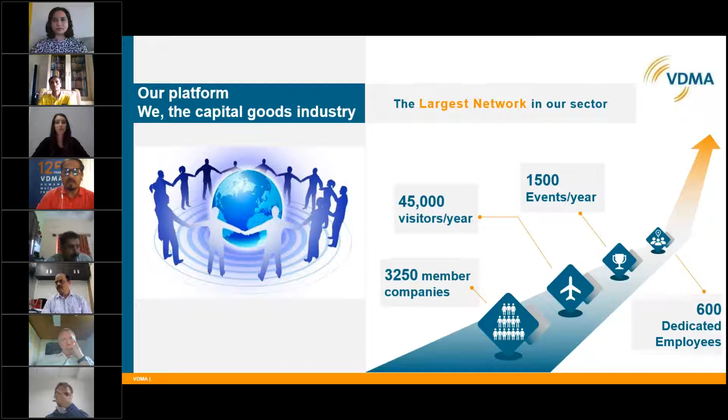Over the years, we have built a member base of 3,250 companies. We have been receiving visitors of 45,000 visitors across the year, every year. We are organizing 1,500 events every year, and we have 600 dedicated employees.

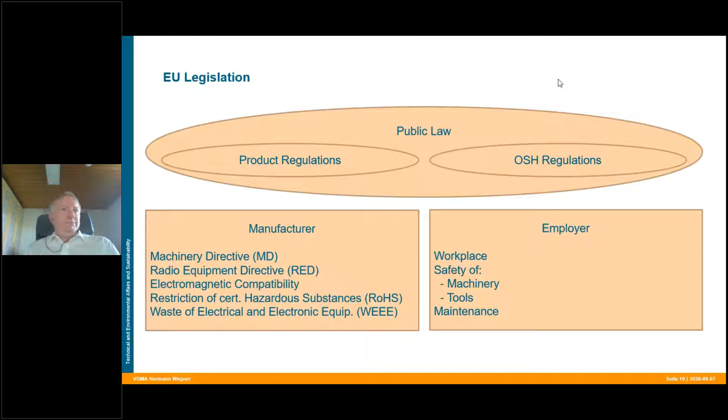For product safety, especially in Europe, you have several documents. The first of them is the Machinery Directive. It's in Annex 1. It describes a lot of mechanical risks, electrical risks, electromagnetic compatibility, and so on.

All these risks described in this Annex 1 have to be mentioned for the machine, and have to be processed in a risk analysis where the manufacturer has to look at the machine itself, at the risks that may be combined with the machine, and to decide if these risks are acceptable or not acceptable.

These risks in this Annex 1 are very common. They are not so specified, and it's not so clear what risk is acceptable and what is not. But to decide this, there exist some technical norms and technical standards like ISO 12100, safety of machinery, general principles for design, risk assessment, and risk reduction.

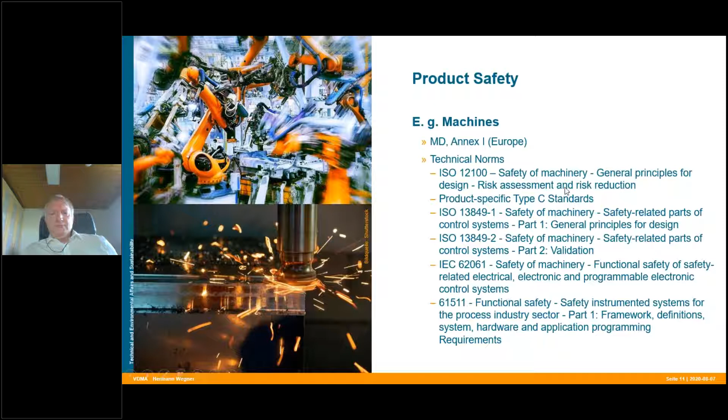For durable, safe machinery, it's not only useful to have a safe product on the market, but you have to maintain it. This is the third point: continuous maintenance for risk reduction is also necessary, because the safety of machinery will decrease over its lifetime.

There are two factors. One is the information of these technical standards. When the machine is produced, they are state of the art, and the application of these standards is state of the art. But as time goes by, there is new information, new knowledge, and when you take this into regard, the inherent product safety is slightly decreasing.

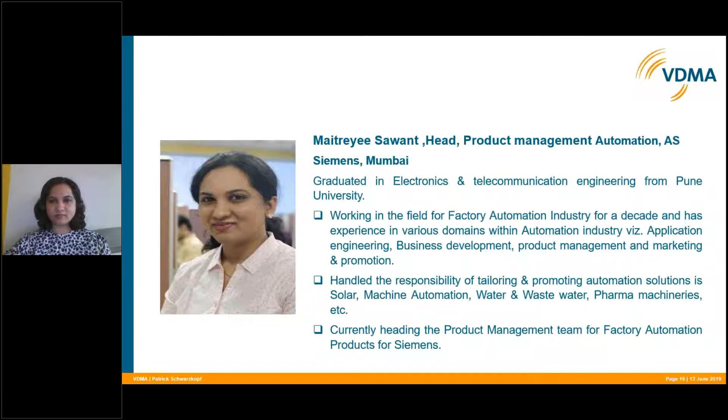Safety of the machine, or of the human working around the machine, and also of the environment in which the machine is working, has become an utmost priority for any manufacturer. So why is it so important, and how can we make our machines safe? We will see it in today's session.

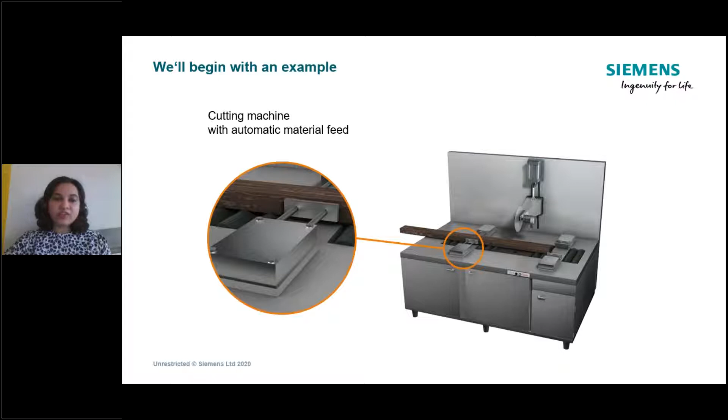Let us understand this with the help of an example: a metal cutting machine. There's a clamp to hold the metal and a rotating cutting disc to cut it. Since this is an open cutting machine, it is evident that it is a very unsafe operation. To avoid any unfortunate incident and the relevant human, reputational, or monetary losses, implementation of safety becomes utmost important. Now, how do we make this machine a safe machine?

There are 3 phases for making a machine safe. First, assess the risk of the machine: understand its operation. All types of operation should be taken into consideration, whether manual or automatic. Risks should be identified, and then there's a stage where you identify the methods by which you are going to reduce these risks. Ultimately, whether the methods implemented are really capable of reducing the risk to an acceptable limit has to be certified and validated. So these are the 3 steps.

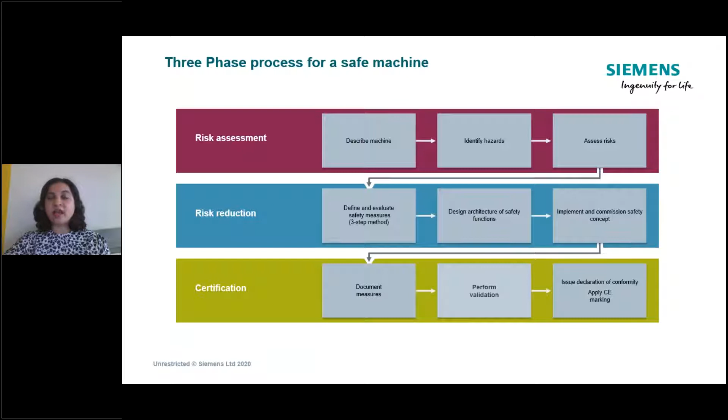Going back to the example, let us see the risks in this machine. This is a very open machine, and the cutting blade captures our eyes - this is something very dangerous. The metal piece is also going through clamps, so there's a possibility that the hands of the operator can get crushed. The operator can also lose his arm because of this open cutting disc. Such cutting machines also emit a lot of dust on account of cutting, which might affect the environment and the people working in it.

These risks are usually categorized into certain levels of risk so that necessary actions can be taken to reduce them. These levels are categorized based on ISO and IEC standards - we have SIL 1 up to SIL 3 level, and PLA up to PLE level. Considering this example, I can see we have a very severe risk, so let us categorize it.

Here we see that if the cutting disc injures the operator, he has chances of losing his arm. This is an irreversible injury, and it's a very high risk. As for how frequently it is expected to happen - since it is an open machine and the operator is working on it in shifts, maybe 8 hours, it is very likely that he might get injured. So this risk is categorized at a very high level.

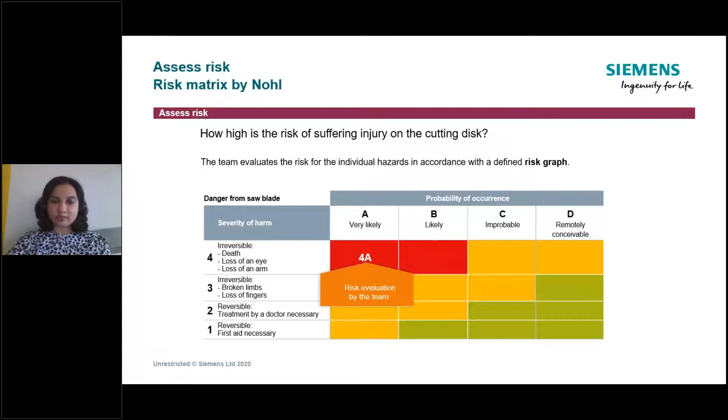Now let us see what steps we can take to reduce this. As Mr. Wegner has also explained in his slide, there are steps we have to take to reduce risk. First, you try whether a change in design would help. If the risk is still not mitigated enough, you look into the technical measures implemented into the machine, changing or adding safety to them. Usually the risk is reduced to a good level here, but if there is still any residual risk, you can use information or notices to the users on what instructions to follow while operating the machine.

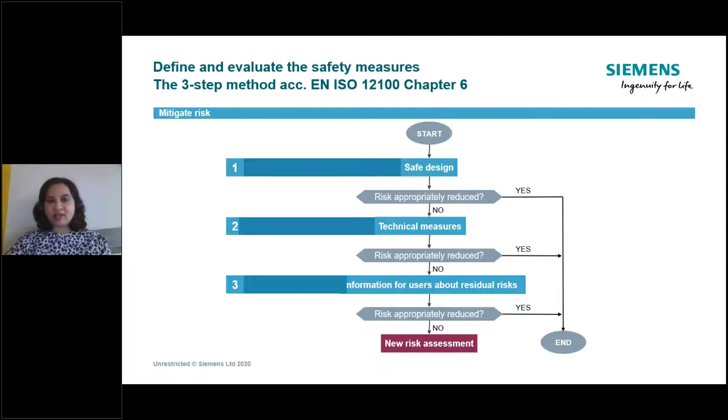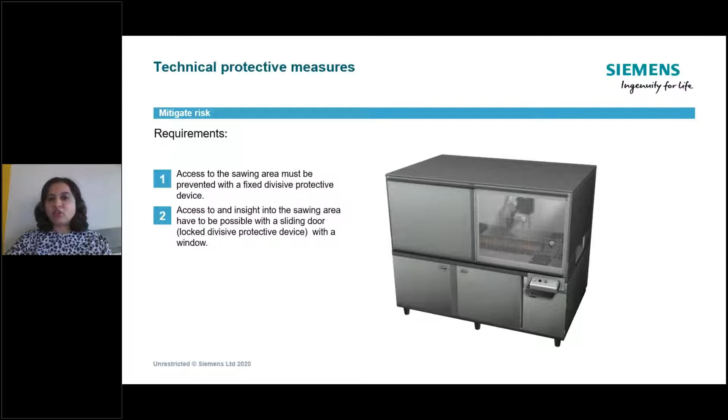Let's implement this on our example. Since it was a very open machine, we have given it an enclosure, and this enclosure will avoid direct exposure of the operator to the arm that was cutting the metal. This will reduce the risk to a good extent - this is what I feel, but let us analyze it. We cannot completely close the machine because there has to be some access given to the operator when required, so there's a sliding door here.

Now let us see the risk chart again. As the risk chart shows, though we have given an enclosure, the risk is reduced, but only the probability is reduced, because the frequency of the operator getting exposed to the harmful components of the machine is getting reduced. But the severity still exists, because if he uses the sliding door and accesses the machine, there are chances he still can lose his arm. So the severity is not yet mitigated - that's why we have to go to the next stage, which is technical assessment.

So here, let us go to the technical assessment on the same machine and see how we can handle it. Next slide.

Talking on the technical part now, what we are trying to do is we are going to detect the position of the protective door. Understanding the position of the door, if we get a feedback that the door is open, immediately a command has to be passed on to the motor to stop. So the machine should stop. This would avoid any harm caused to the operator while he's working on the machine. Additionally, we also give an emergency stop to the operator so that if he feels it is an unsafe situation, he can himself stop the machine.

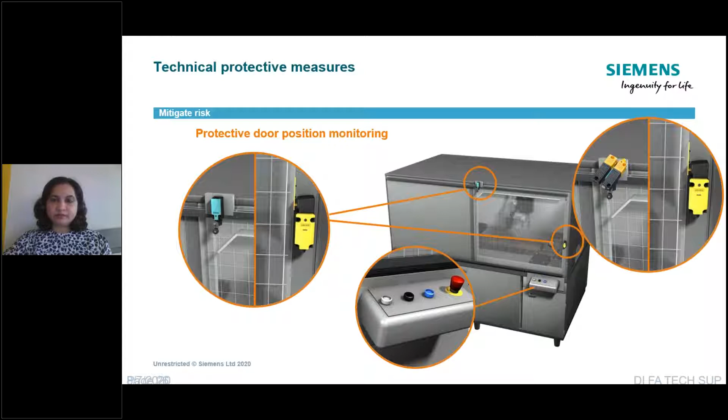So here we saw that since the chances of the operator getting injured because of the disk is reduced to a good extent, and since he's going to open the door and the machine is going to stop, at the most he will have a cut or something like that. So this is okay, we are in the green zone now, good to go. This is how we mitigate the risk of an unsafe machine.

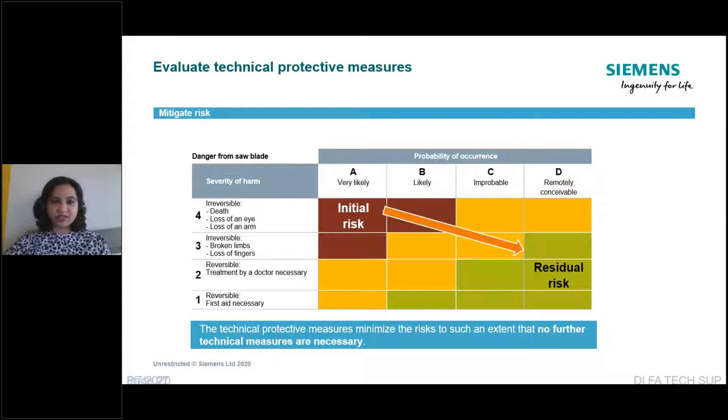So what we did here to mitigate the risk was that we detected the position of the safety door. We evaluated whether this is an unsafe condition and what has to be done, and the necessary action was taken by giving a command to the motor to stop. So the cutting disc was also stopped immediately. This is where the safety system fits in, and the safety system works in 3 levels: detect, evaluate, and react.

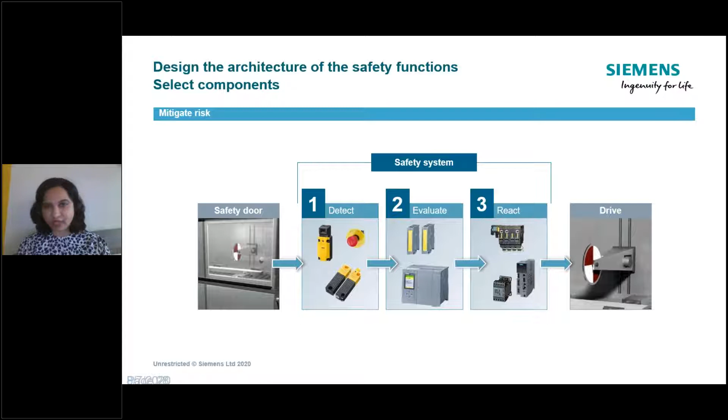Evaluation is the stage in the safety solution where automation plays a big role. So in evaluation, the PLC as well as the IOs play a major role there. Now this PLC and IOs I am talking about are a safety PLC and safety IOs. The safety CPU and safety IOs are designed with an inbuilt testing circuitry. It comprises dual channel processors in order to confirm the signals received, and it follows a coded processing technique which creates a diverse logic. This logic is created on the received signals, which ensures that the detection of fault is surely confirmed. Any discrepancy, if detected, the signals are sent on priority to bring the machine to a safe shutdown.

Additionally, the IO modules used are also designed to continuously monitor for errors like short circuit or wire break, etc. This continuous monitoring can help early detection of problems and bring the machine to a safe shutdown at the right time.

Next slide, please. Thank you. So these modules as well as the safety PLC are continuously evaluating, and there is something called passivation and depassivation which it follows.

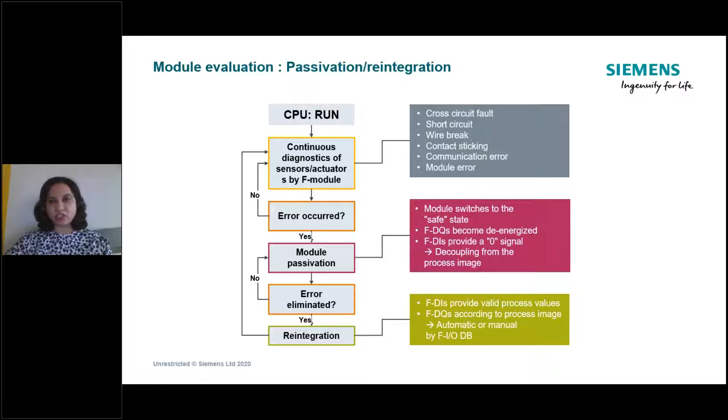In a continuous diagnostics of the sensors and actuators by the fail-safe module, it detects whether some error has occurred, and if an error occurs, the module goes into a passivation state, so it is de-energized, the DOs become de-energized. There are possibilities of module passivation as well as channel passivation. In case the error is eliminated, a normal PLC would just start when the error is eliminated, but for a fail-safe condition, though the error is eliminated, the depassivation is still not done. In this case, an acknowledgement is expected, and on the acknowledgement only the depassivation is done and the DOs are re-energized.

So what are the possible varieties of safety IOs and safety controllers available in the market today? It is not that for fail-safe application you have to go for a very high level controller. There are fail-safe controllers available right from basic automation level up to advanced controllers. There are also fail-safe controllers available in distributed architecture. In case you want to install a soft controller or soft PLC on your PC, that is also possible with soft controllers available in fail-safe variant. And in case you want to implement a high-level language program along with a PLC language program on the same platform, that is done by an open controller, which is also available in fail-safe versions. Now, these we talked about are all mounted in IP20 type of installation, but there are controllers supporting fail-safe operation in IP65 and 67 type of installation as well.

Moving on to the variety of IOs that you can choose from. There are centralized IOs, the standard IOs and the fail-safe IOs can be mounted together on a single controller.

Then there are distributed IOs for a decentralized architecture, and fail-safe distributed IOs as well. In case you want to mount the IOs directly on the machine, that is possible. We have fail-safe IOs supporting IP65 and IP67 installation, mounted on the machine and supporting all the vibrations necessary for that.

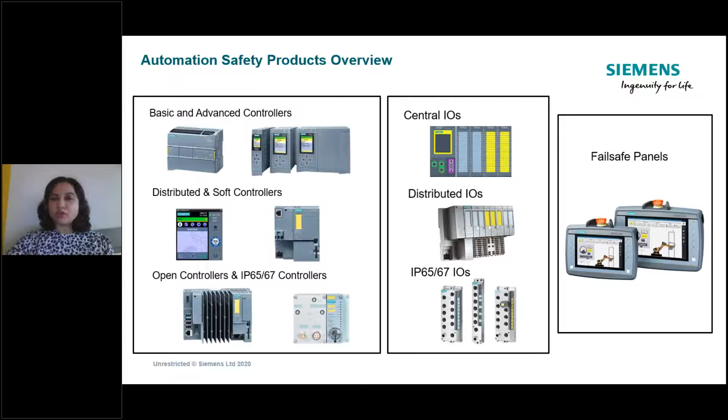It is created for timely transfer of safe data. These frames include an integrity check, so integrity data check, that is the CRC data. It also includes timing information - time monitoring is done continuously, and that information is embedded here. It also has accurate identification of senders and receivers embedded. So this means that ProfiSafe ensures right data at right time and at right place.

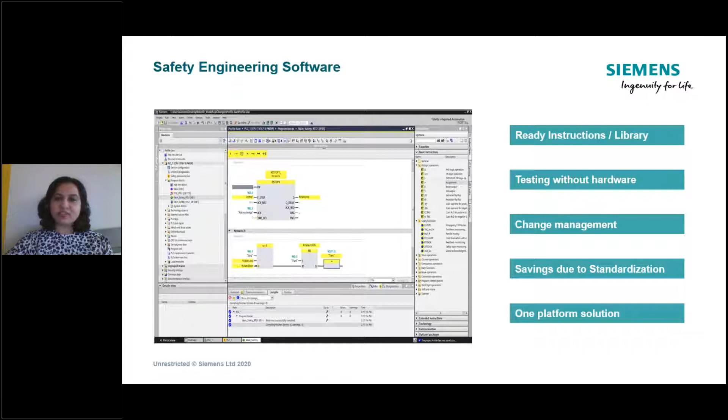What happens here is, okay, this is good, but this is very traditional now. And what happens here is there's a lot of wiring, a lot of engineering effort, and so many interlocks, so to manage it becomes a little critical. So there is also a new trend which has evolved and which we as Siemens are continuously promoting, and that is integrated safety. So we see it on the next slide.

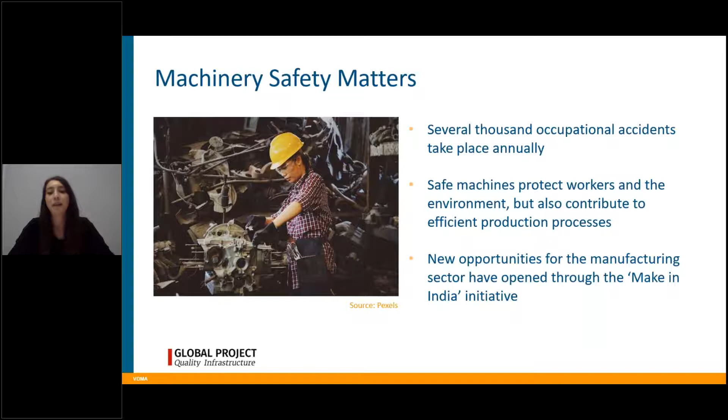And of course, machinery safety is also an important topic because of new opportunities that have opened up in the manufacturing sector, for example, through the Make in India initiative.

The Indo-German Working Group on Quality Infrastructure provides a forum for both countries to discuss the significance of machinery safety and also to understand each other's approaches to machinery safety. It was established in 2013 by the Indian Ministry of Consumer Affairs, Food and Public Distribution and the German Federal Ministry for Economic Affairs and Energy. The working group brings together representatives from ministries and government institutions, standards and accreditation bodies, industry associations and companies, as well as technical and scientific institutions, and provides a forum for political and technical dialogue between all of these key stakeholders.

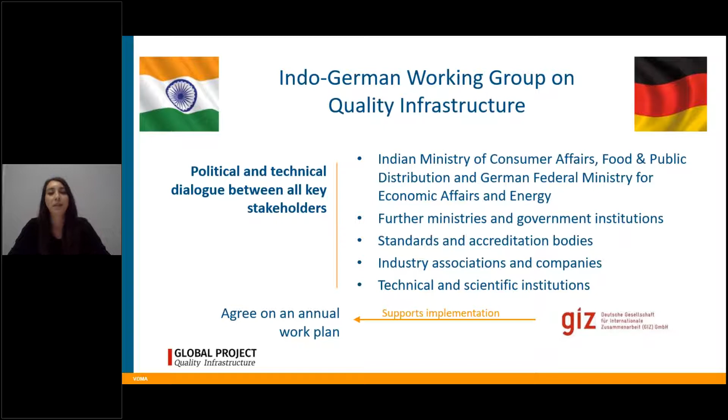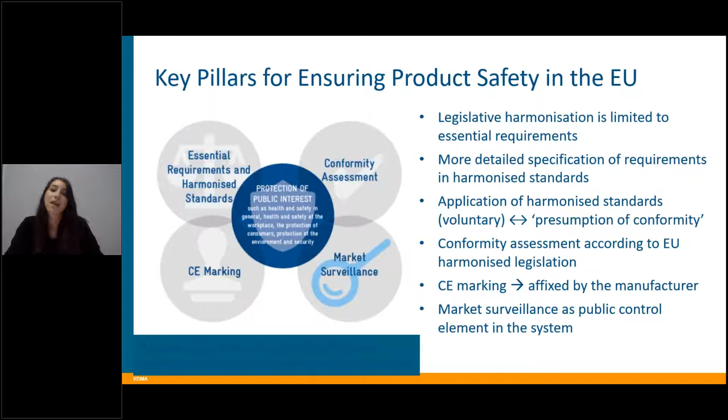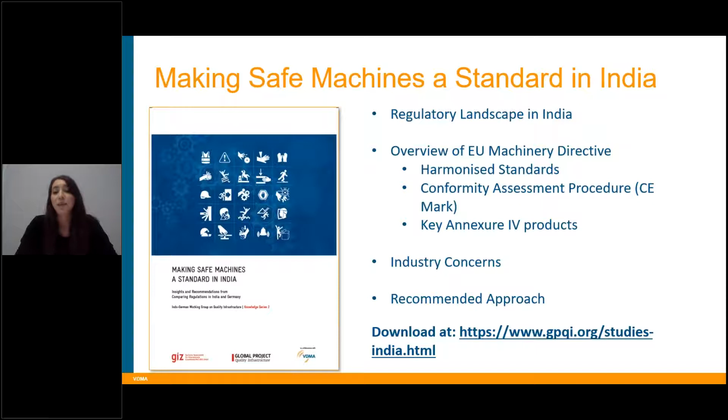A publication called Making Safe Machines a Standard in India was prepared within the framework of the Indo-German Working Group in collaboration with VDMA in 2018. It provides an overview of the EU Machinery Directive, outlines the current regulatory landscape for machinery in India, and also identifies challenges faced by the industry. It also includes recommendations on the way forward for Indo-German cooperation on machinery safety. This publication can be downloaded for free on our website, gpqi.org. Please feel free to visit there.

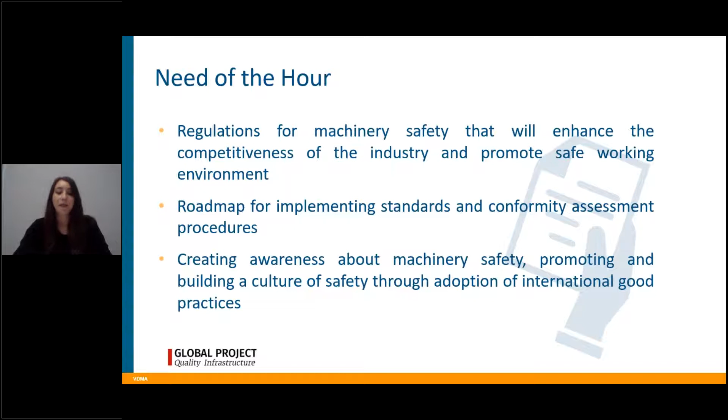Based on these conclusions, current proposals for the way forward for Indo-German cooperation in the field of machinery safety are to provide support to OEMs and the user industry on how to meet applicable standards and regulations, sharing of implementation experience of the machinery directive from Germany, and also to share best practices on how to develop a market surveillance system for machines.

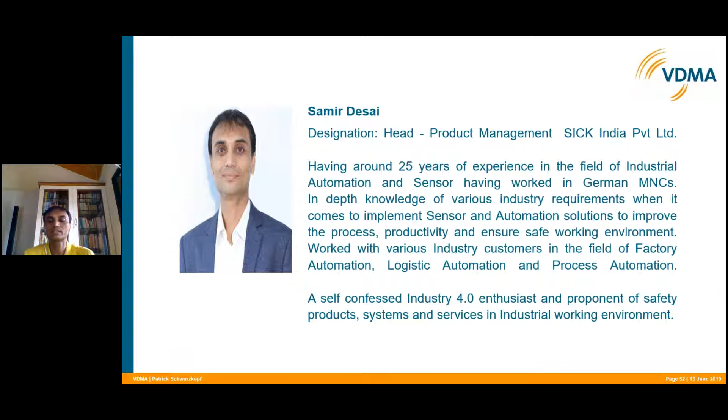Now everyone is talking about functional safety standards in India. So everybody who is attending this seminar must be wondering why it has become such a buzzword today. The reason is the safety standards.

Of course, government is working on this and some development is going on, which we will get to know in our next presentation from BIS. And as mentioned by Ms. Farah, there is a German group also working closely with the Indian government to see how we can design and implement safety standards in India.

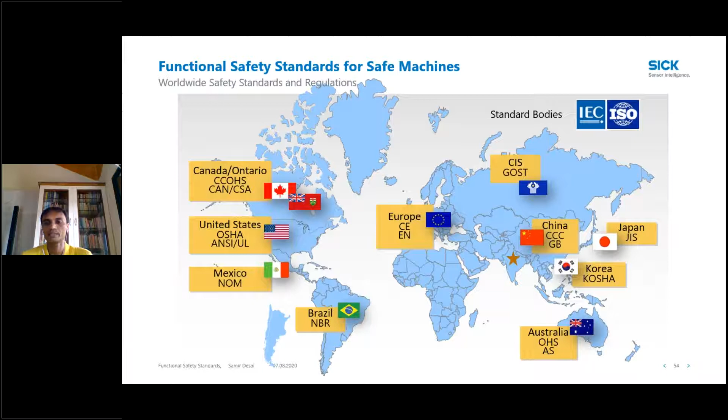Coming from a German company and with association with GIZ and this working group, it makes sense to have a look at what has been done at the European Union. They have implemented these safety standards. I will not go into much detail, but it is imperative to understand that there are two parts of this: one for the manufacturer, one for the end user.

So if you look at this machinery directive 2006/42/EC, which is a very famous machinery directive, it is applicable for both manufacturer and end user. There's also a work equipment directive, 2009/104/EC. So these are the two directives which guide both manufacturers and users.

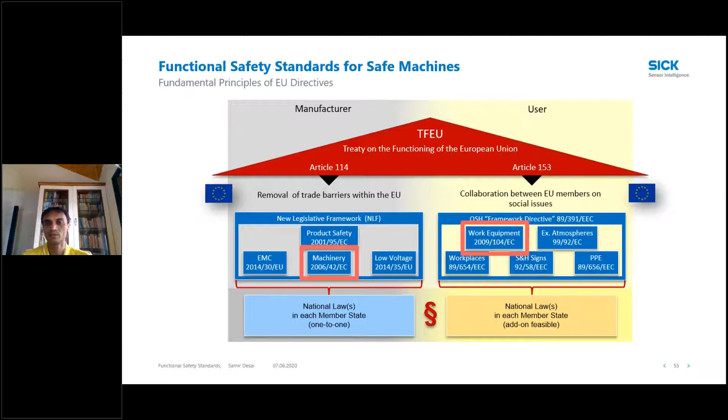Now, what does this machinery directive call for? It is talking about the machinery directives for manufacturers. So manufacturers of machines, integrators - for example, someone manufacturing a robot, and someone taking this robot and implementing robot cells becomes the integrator. There are distributors of machines who are just buying and selling, and there are people providing safety components like safety sensors or safety PLCs. So all those people are covered by this machinery directive, and there are certain obligations on them.

These obligations are risk assessment - they are supposed to assess the risk of a machine. They have to ensure that the machine has a safe design. They must eliminate, or if not possible, minimize the risk, and then provide technical documentation and operating instructions before they put their machines with a CE mark.

Now, when it comes to the end user, the people who are going to use this machine, again there are some obligations. They have to ensure the safety of machines. They also need to eliminate or minimize the risk. And the most important part is there has to be inspection or testing by an expert.

So your work is not ended once you buy a very safe machine. You have to periodically inspect it, have testing done by an expert, and ensure that this machine is working as it should have been. Also, there are ergonomics and occupational health hazards which you have to take care of, and provide training to your workforce about the work equipment and the risks involved.

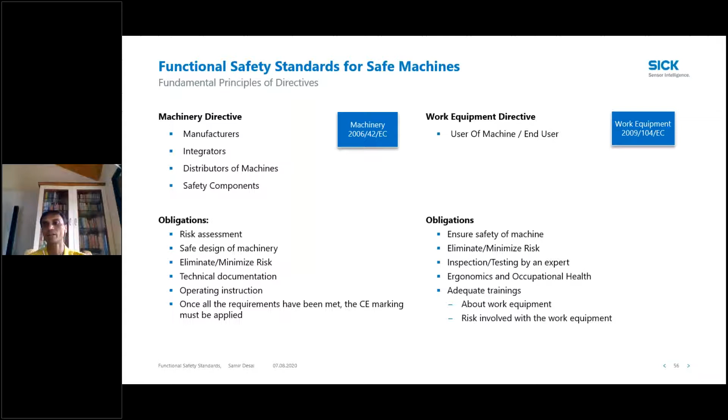Now, as a manufacturer, you would always like to design according to the state of the art, and as a user, you would like to have state of the art operations. But what happens? You just cannot put your machines out in the market like that.

So you have to do risk assessment. You have to reduce the risk if you are a manufacturer before you sell your machine to end users. And the end user also has to do risk assessment. He has to maintain the machines, and after putting them into service, the employer has to do regular inspections. So his work is not over. There is a periodicity which has been given depending upon the type of machine.

At minimum, it is 2 years in Europe that you have to get these periodic safety inspections of your machines. And for the machinery manufacturer also, if he makes any substantial modifications in the design, he needs to revalidate the machines. So these are the basic aspects of the safety standards. Though it looks a little scary with all these standards and what is to be done, if you follow this simple methodology, you can decide what is required to be done.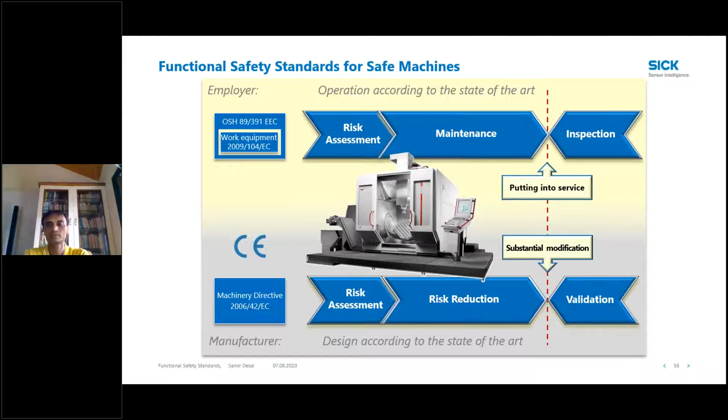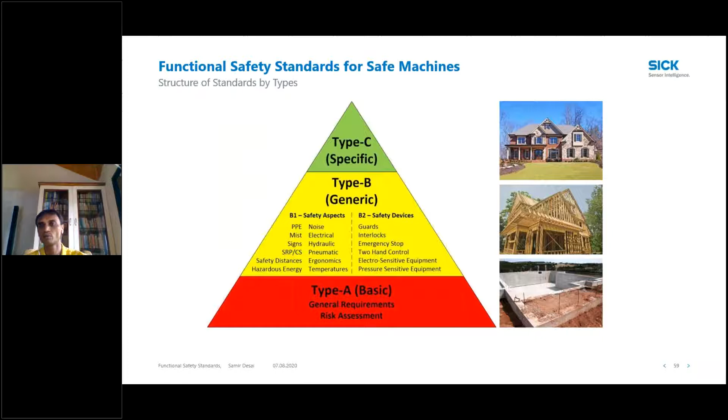So this is the chart we generally follow, and then we decide which standards to go for.

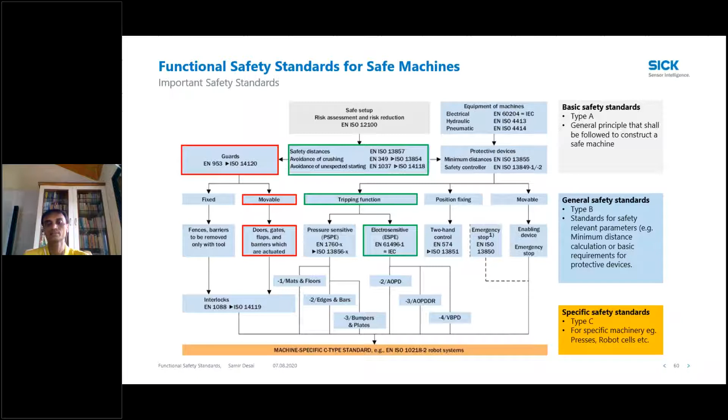Now the question is, is my machine safe if I use all safety components? Everybody thinks, okay, I'm investing a lot of money buying safety devices, everything looks fine. But what is the answer to this question? Is my machine safe? Even if I use all safety components, the answer would be no.

This is where safety standards come into the picture. For example, if we use a safety light curtain, it makes sense to decide where to put it in the machine, meaning which position, where the hazard is, for instance in a press machine. If you put your safety curtain too close to the hazardous movement, by the time it is infringed, there's a possibility, depending on the case, that the safety mechanism works but you are still in contact with the hazard.

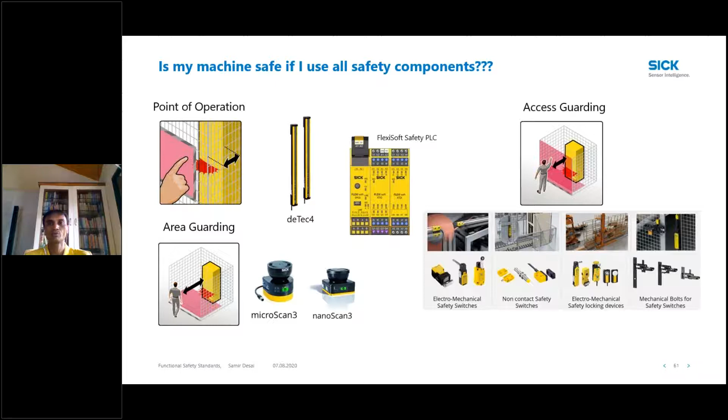This is where the safe design of a machine, the risk assessment, and everything comes into picture. It's not always about hardware, but also about safety services. It's not sufficient to just buy safety components and implement them for your machine to become safe. So if you go to the next slide, SICK has very wonderful literature documentation available.

We call it '6 Steps to a Safe Machine.' There's a lot of information on how you can make your machine safe. This booklet can be downloaded from our website www.sick.com, and it can be used by anybody, whether you are a machinery supplier, machinery manufacturer, or a user.

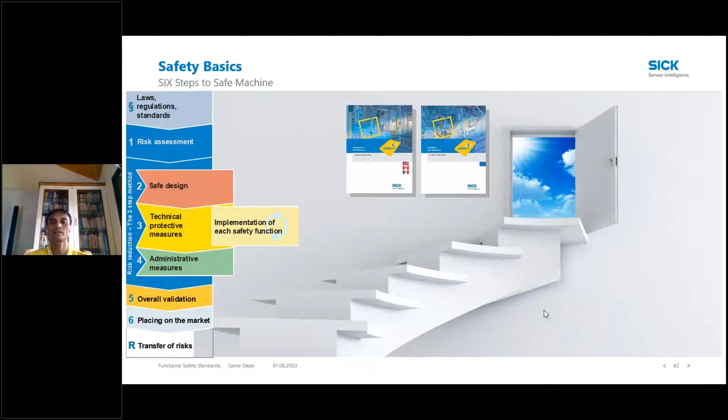It talks about local laws, regulations, and standards first, because these change from country to country. Then it talks about risk assessment, followed by the three steps which I'll cover in my next slides. Then comes validation, and then placing it on the market and transferring the risk.

Now, if you look at the 3-step method of reducing the risk, can you move to the next slide please?

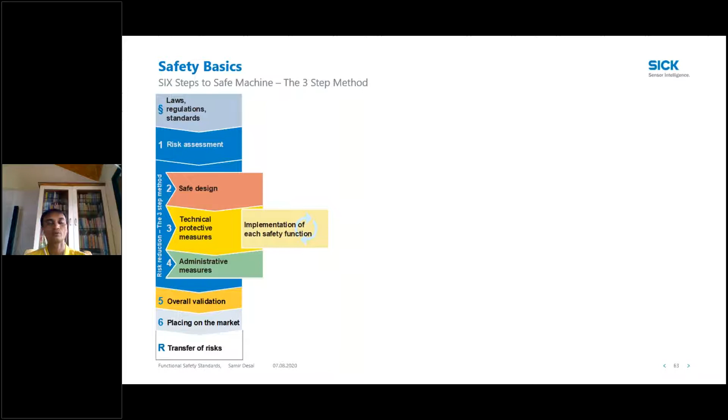So the task is, let's say, have a safe design. I would like to eliminate to the extent possible, or minimize the risk. I will check whether it is possible. And I say, yes, it is possible to make a safe design.

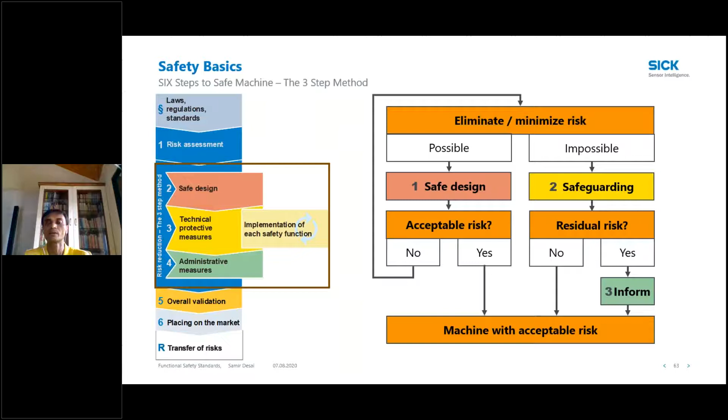And then there are chances that in certain cases there is still some residual risk. So you try to eliminate, you try to minimize risk, you try to safeguard, but still the residual risk remains. And this is where the administrative measures come into picture, which is nothing but providing information to the users, to the operator, that there's a risk with these machines and you are supposed to operate in so and so manner only. And this is where the documentation part comes into picture.

So what we are trying to do is avoid the hazards. If avoiding hazards is not possible, because the operator has to put the job into the press machines, then we have to safeguard it.

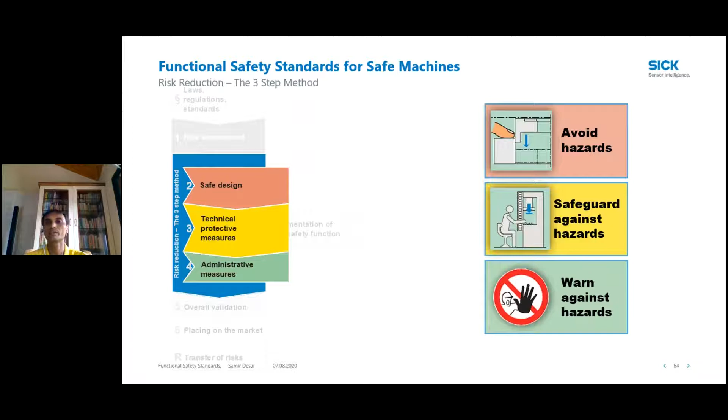And after the safeguarding, if there is still a residual risk, we need to inform the people that this machine has a hazard, there is unsafe behavior, unsafe movement here, so you have to be a little bit careful while working in this area.

And still, for people who are not aware that there is a leopard behind this cage, you can always put a sign that there is a risk behind this and you have to be careful, you should not poke your finger inside, otherwise you might lose your finger. So this is how the safe designing of a machine works. This is at a very, very broad level. These are the standards I try to explain.

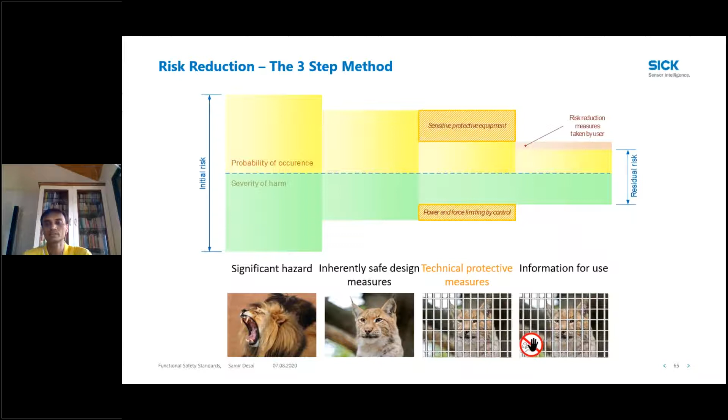As I mentioned, it is not only necessary that you buy safety components or safety hardware or safe machines. There has to be a risk assessment which has to be done, and this is where the service part comes into picture. So all the users or these machinery manufacturers, they have to undergo this particular cycle, and we also offer such kind of expert services where we do the risk assessment of a machine.

After assessing the risk, we can offer guidance and consultancy on the safe design, how to use it, which component to use. We will also do the commissioning check once the machine is installed. The initial inspection, the first inspection can be carried out, and there has to be a periodic inspection because every 2 years we have to check. It so happens that there are safety measures when you buy the machines, but after 2 years, a lot of maintenance people change.

So there might be some changes, so you need to check this periodic inspection. And most important part is during all these inspections and assessment, we are also going to check the stop time measurement. Now this is very, very important.

We are using safety in order to avoid hazards. So if there is an unsafe movement, we would like to control this and we have to stop this. So by the time I put my hand inside the press machine and the safety light curtain is infringed, it is giving a command to the motor, the contactor is de-energized and the motor is stopped and the mechanical plunger has come to stop. So all this is going to take some time.

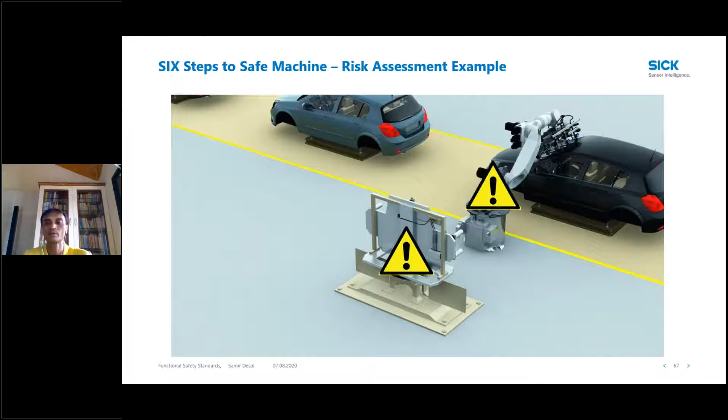Now, if you go next, just click once. Yeah, so there are two hazards. Just go back. There are two hazards. One is with the workbench, which is moving, and one is with the robot. Now, if I follow the 6 steps of the safe machines, I will assess the risk, I will try to make it safe, the design, and then I will put the safeguards.

So if the workbench is moving, if somebody walks in those areas, then also we can control the movement of the workbench. Either we can slow it down, or we can stop it down, or at that time we can also stop the robot. So depending upon how the productivity is getting affected, how we would like to do your operations, these are the various mechanisms which can be employed.

So it is not only buying and installing the hardware, whether it's a safety PLC or the safety light curtain, but we have to be very, very precise about where it is mounted, why it is mounted there, what are the risks and what are the hazards. Now, again, you also need to periodically check after 2 years, maybe the fencing has been removed by somebody or not, and this is where the periodic inspection comes into picture.

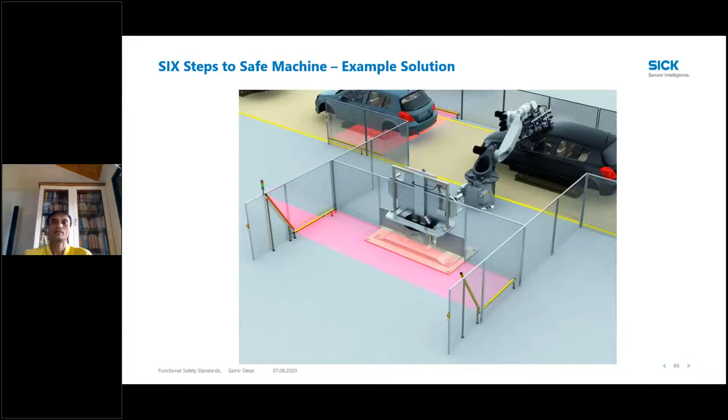So this is all from my end. I hope I am able to give you some insight on how you can make your machines safe. If there are any questions, we will be happy to take them later on.

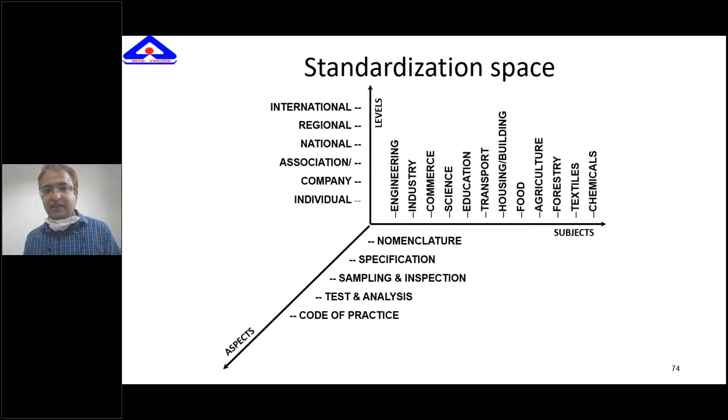There are around 14 division councils in BIS making standards in various respective disciplines, be it textile, electronics, electrical, mechanical, or food. So we have 14 division councils, and in each division council we have various technical committees, subcommittees, and panels under these technical committees.

BIS itself is not making standards. However, I would say BIS is an enabler, providing a platform for all stakeholders to come and make standards as proposed in the committee.

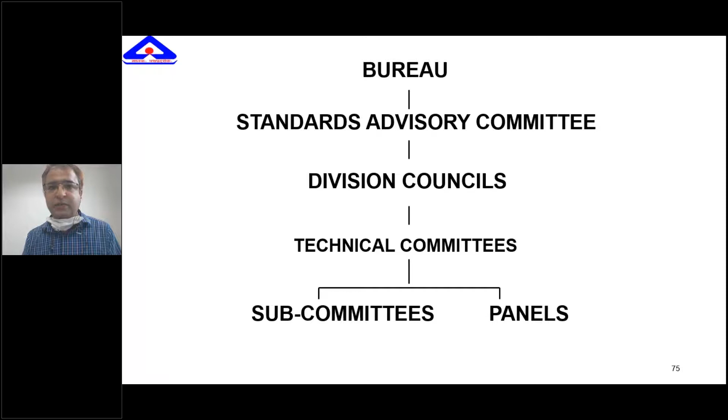These are the various division councils - chemical, civil, electrical - and I am working in the mechanical division council, MEDC.

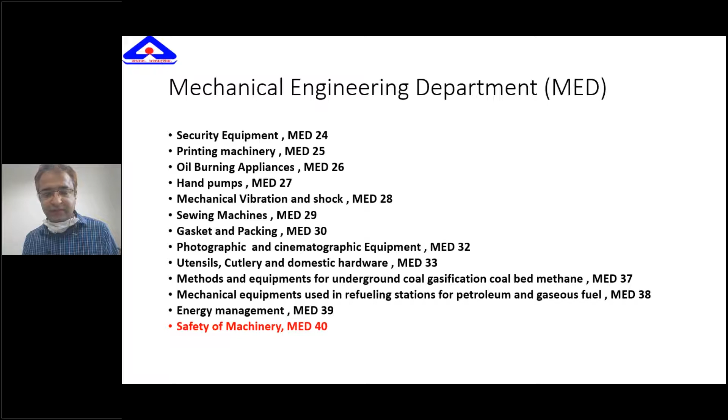This is just the composition of a sectional committee. A sectional committee is constituted by the division council, and its members could be from manufacturers, consumers, government organizations, technologists, testing laboratories, consultants, and other experts. In our regulations, it is mentioned that the interest of the manufacturer shall not exceed 33% of the total strength of any committee.

This is the typical workflow of how standards are made in a given context. This is not necessarily a fixed workflow, but it can be reduced or extended based on the complexity of the document and as per the decision of the committee.

To start with, any new work item is proposed, and it shall be accompanied by an initial draft. It is circulated amongst the committee members, and if the committee is satisfied with the overall outlook and structure of the draft, it is processed for pre-draft and again circulated to committee members for their comments. One more thing I would like to highlight is that BIS does extensive stakeholder consultation before we finalize any standard as an Indian standard.

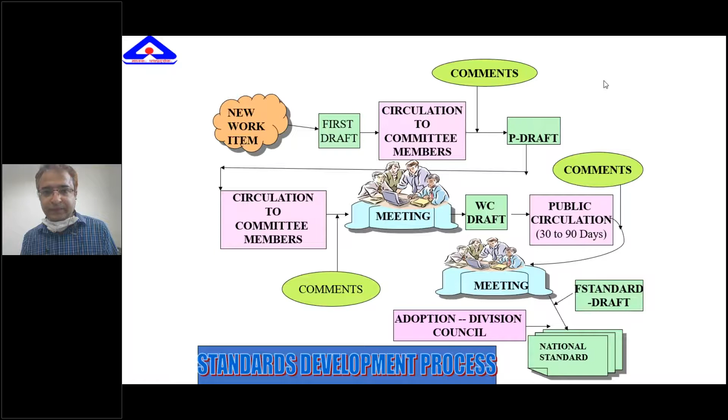If typographical errors are there, or one more thing I would like to highlight, Indian standards or any international or national standards are not rigid. That means we are open to amendments of progressive and positive changes in the standard which have a positive impact on the quality of the product, making it safer and more user friendly. Generally we revise our standard after 5 amendments.

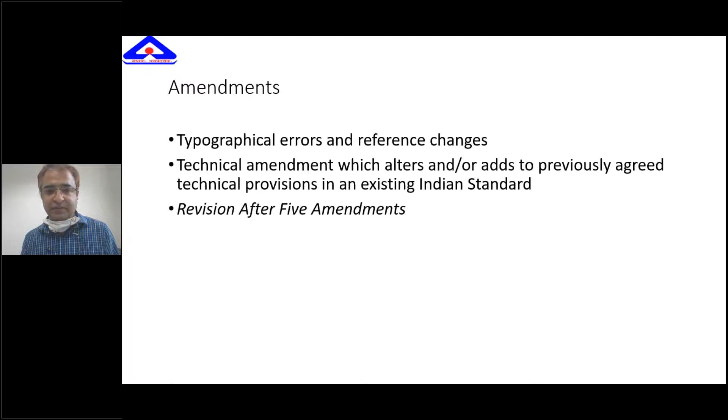As per our BIS Act, we have to review our standards. So what are the courses of action? We can reaffirm it as it is, or if certain changes are required, we issue an amendment, or if major changes are required, we take the standard for revision. If the technology of the product is no longer being used and it is felt to be absolutely obsolete, then with consultation of stakeholders, we withdraw such standards. A systematic review has to take place at least once in 5 years.

As informed earlier, BIS has constituted the Safety of Machinery Sectional Committee MED40, whose scope is standardization of the basic concepts and general principles of mechanical safety of manufacturing machinery, incorporating terminology, methodology, guards, and safety devices within the framework of ISO/IEC Guide 51 on safety aspects and guidelines for their inclusion in standards, in cooperation with other technical committees. This technical committee is the National Mirror Committee of ISO TC 199.

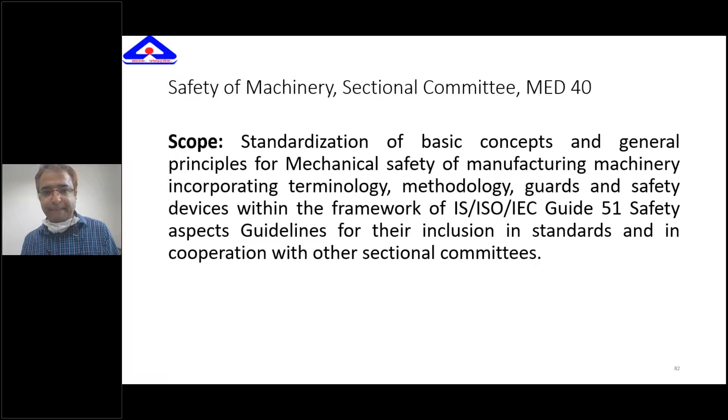It is the National Mirror Committee of ISO TC 199. In this committee we have 32 standards which have been published by ISO TC 199 and adopted as Indian standards. This includes ISO 12100, for safety of machinery - general principles for design, risk assessment, and risk reduction, which is the mother standard for any safety of machinery. It outlines the principles for risk assessment and risk reduction to help the designer achieve safety in the design of machinery. Could you please click on this link, program of work MED40.

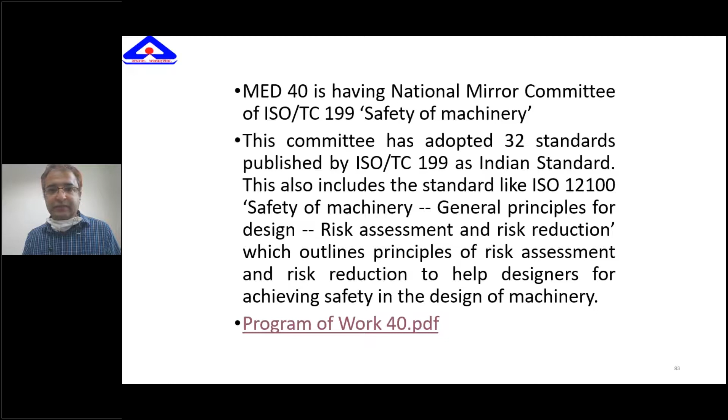Okay, never mind. So this is just a list of the standards which have been published, 32 standards. These are also available on our website.

In ISO 12100, the classification of safety standards is there, which classifies them as type A, type B, and type C. Our earlier experts also mentioned that, but I will read the text mentioned in ISO 12100. Type A standards are the basic safety standards, giving the basic concepts, principles for design, and general aspects that can be applied to machinery.

So it is like a foundation of a building, as rightly said by Mr. Samir, that any machine risk assessment as per type A standard is applicable. It is the right of any employee to work in a company and have a safe working environment. He should be a happy person to go home safe every evening without having any injury or severe injury. So type A standards are there.

Type B are generic safety standards, which deal with one safety aspect or one type of safeguard that can be used across a wide range of machinery. These are further classified as per 12100. Type B1 covers safety standards on a particular safety aspect, be it safety distance, surface temperature, or noise. We are also having type B2 standards.

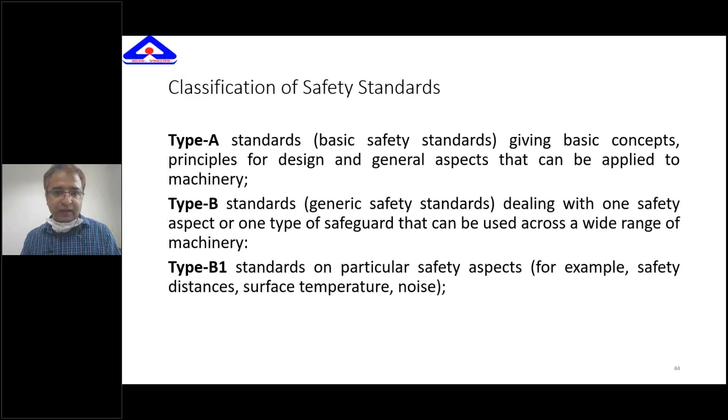Type B2 standards are also on safeguards, for example two hand control devices, interlocking devices, pressure sensitive device guards. So these type B standards are applicable to a machinery or a group of machinery.

Type C standards, as per this standard, are machinery safety standards which deal with the detailed safety requirements of a particular machine or group of machines. So BIS is actively working on type C standards. Recently we have published the plastic molding machine safety standard, which is a type C standard. In the PGD department, we also have type C standards on manufacturing machinery as well. Details are available on our BIS website.

The primary ISO 12100 has been adopted in dual numbering as IS 16819:2018. It provides the designer with the overall framework and guidance for decision-making during the development of machinery, to enable them to design machines that are safe for their intended use. It also provides a strategy for standards developers and will assist in preparation of consistent and appropriate type B and type C standards. One more thing I would like to mention here is whether in the case where the provisions of type C and type A differ.

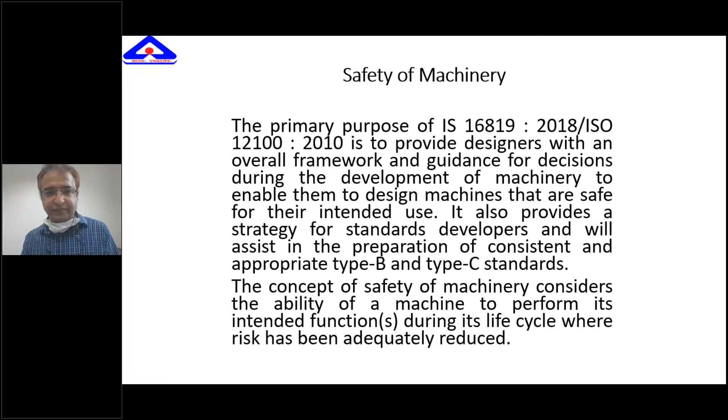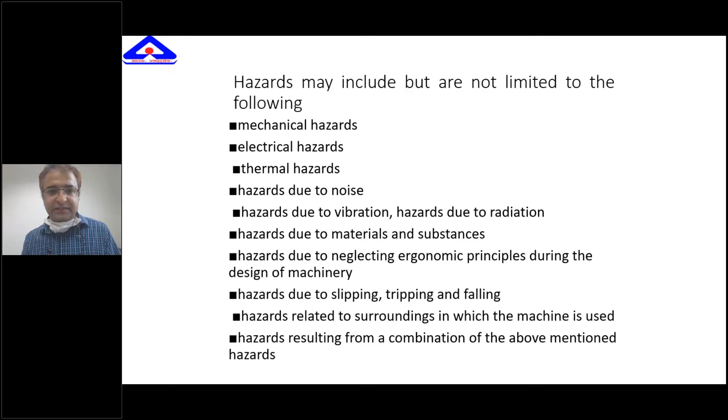Hazards may happen in all phases of the life cycle. This has also been discussed already.

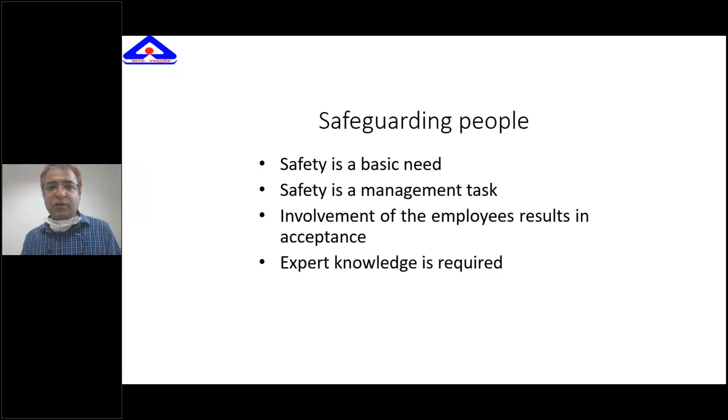The basic purpose of safety standards is safeguarding people, as safety is a basic need. Everybody wants to work in a safe environment, and safety is a management task. But involvement of other stakeholders, like the operator of the machine, the maintenance person, or any other related person, they are also involved and equally responsible for safe working of the machine. And of course, expert knowledge is required for installation and for designing the machine.

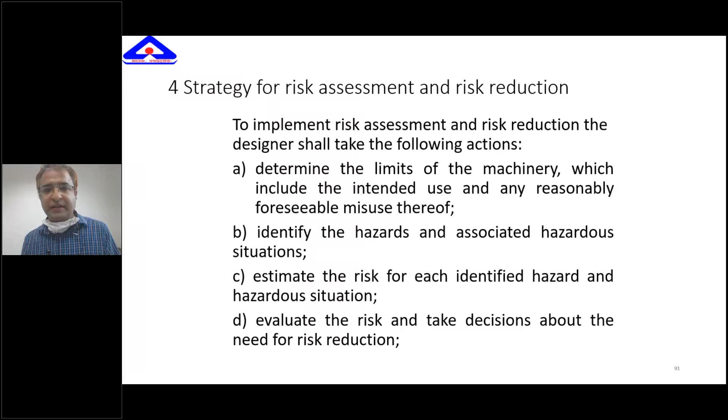These are the strategies which have already been discussed by earlier experts. These alternative methods are used to reduce the risk and make the machine safer.

Any question? I can take those questions. Thank you, Mr. Gupta. We'll take the questions after the presentations.

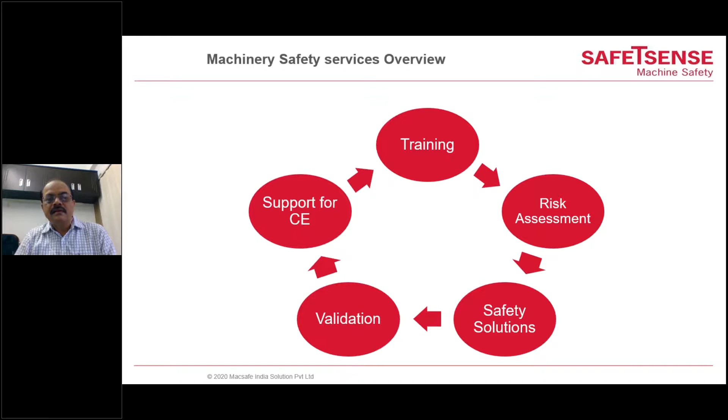Apart from that, we also offer further services which are listed here, which are more related to assessment only, but different types of assessments.

I just wanted to relate risk assessment with doctor's approach to human safety when you have a cold or cough kind of symptom.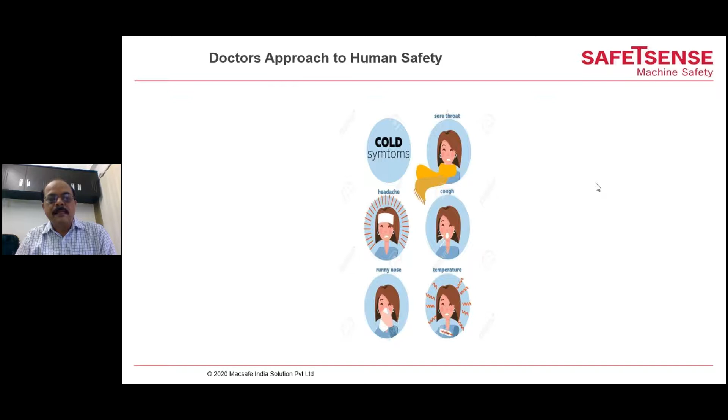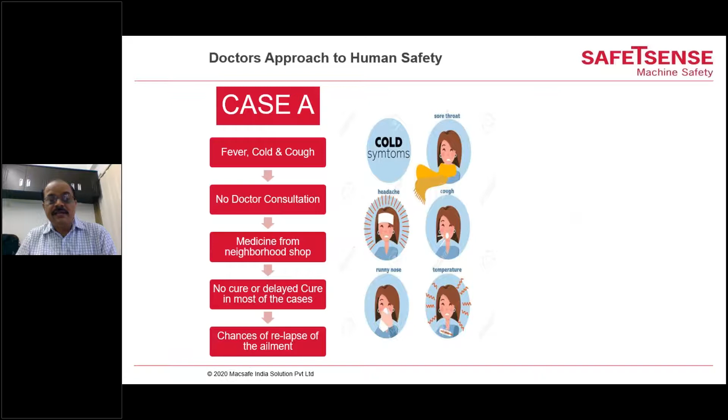So there are 2 cases. In case A, you have say fever, cold, and cough. You don't consult a doctor, and you take medicines from the neighborhood shop, and either you are not cured or your cure is delayed. And the chances of relapse of that ailment is very high because you have not gone to the core of the ailment. And now there can be case B.

Where you have the same fever, cold, and cough, but you have consulted a doctor. Probably you have also done a test, and you have taken medicine based on a prescription from the doctor, which will ensure that you are cured faster, and there is little chance of relapse of the same ailment. So now coming to the machinery part, why risk assessment is necessary?

Let's take a blister pack machine. This machine, we did safety implementation long back, and actually we didn't do the risk assessment. But we provided all the safety guards as per ISO 14120, and also we provided all the interlocks and emergency stop push buttons as per relevant standards. But we didn't do a risk assessment.

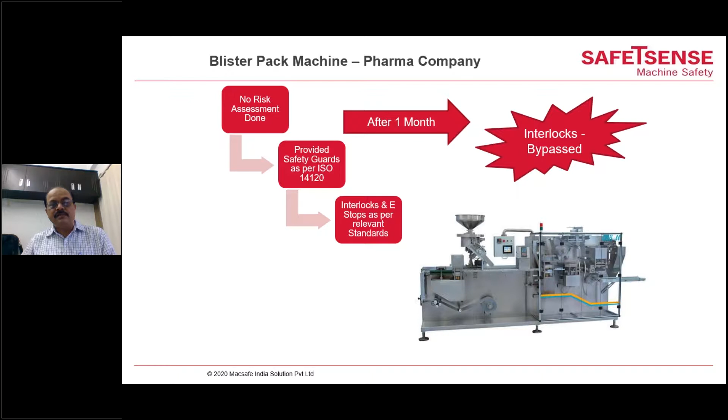What happened after a month? We saw that interlocks were bypassed. You know why?

We found after a month when we visited this site that interlocks were bypassed, and we tried to inquire why. We came to know that for printing on the blister packaging, ink had to be poured in a tray in the running machine for better applicability of the ink. Plus, the blister packing material had to be aligned for every new job between the rollers in the running machine. Because of this, we had not given any provision for this, and that's why they bypassed the interlocks and did all these functions with the running machine with no interlocks.

Next slide please. Take another example from a food machine user. I hope everyone knows there is a dough dividing machine in food industry which makes bread or any such type of product.

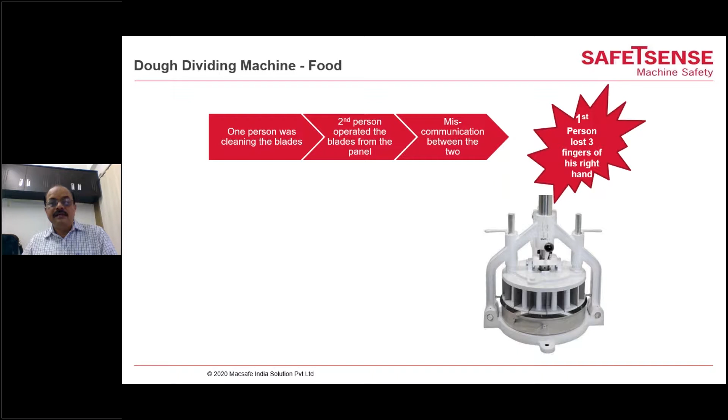So one person was cleaning the blades. It was a cleaning activity being carried out. The second person was operating the blades, because you cannot clean all the blades from one position. You have to rotate it one by one and clean one by one. The second person was rotating it whenever the first person was saying rotate. But what happened, eventually there was a miscommunication between the two, and the first person lost 3 fingers of his right hand while cleaning because he rotated when his hand was inside.

We found out that there was no risk assessment done for this cleaning mode, and the basic reason was that this first person who lost his 3 fingers had no exclusive control with him so that he could stop or run the machine.

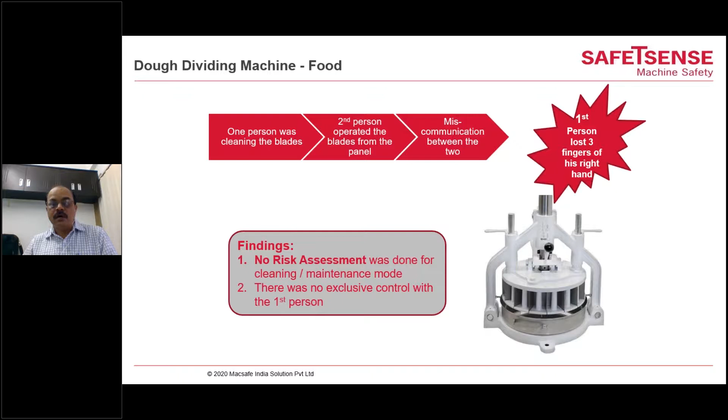But what happens, he suddenly sees that he has left one of the tools, the tightening tool, inside the press machine itself. Then he immediately puts his hand inside to remove that tool. But by that time, the press has already started moving, and because of that, he has a major bone fracture of his hand.

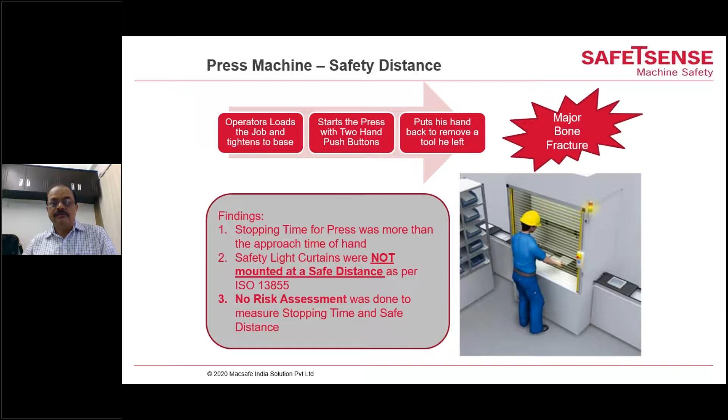And you know why this was done? This was also taken up by Mr. Samir Desai during his presentation, that this light curtain, safety light curtain, was not mounted at the right distance. So this is also a very, very important aspect of risk assessment.

Next slide, please. So with the three scenarios, we always see that we have to get into the core of the injury chances or the sources of injury. And it is not only the normal operative mode or the auto mode where the risk assessment should be done, but we should also do it during other modes of operation. And as others have said, it should also be done during other life cycle phases of the machine, right?

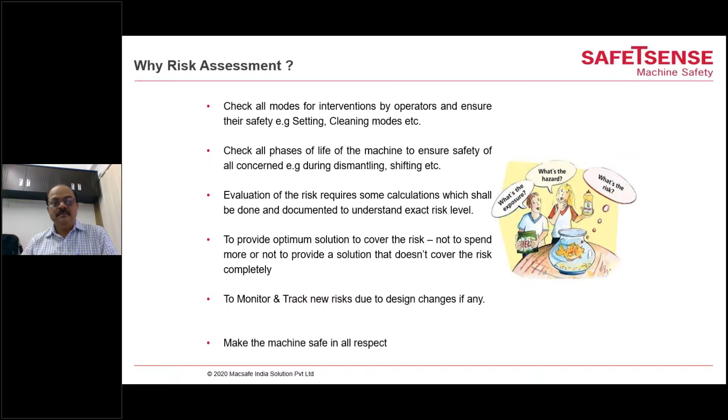So this is all about my presentation. We can take up the questions now. Okay, thanks a lot for my presentation. Next slide, please. Thank you, sir.

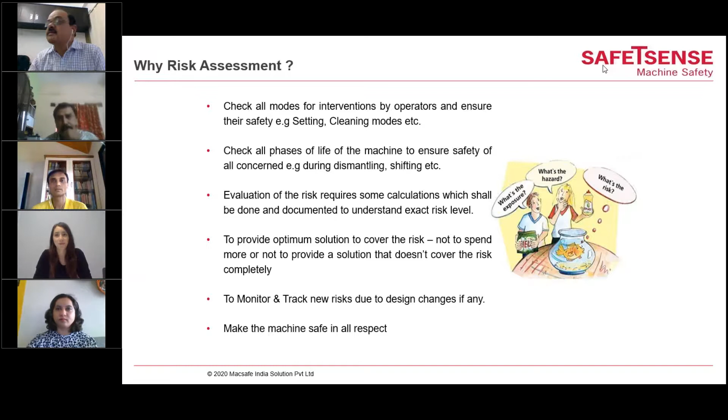And my first question goes to Mr. Wagner, Mr. Herman Wagner. And the question is, in reference to the CE mark, whether safety risk assessment can be done only for the completed machine or also for the partly completed machine. So, Mr. Herman Wagner, this is a question for you.

No, risk assessment can always be done for a machine. It doesn't make sense, or the machinery directive doesn't make a difference between a completely completed machine or a partly completed machine. You can always perform a risk assessment for, let me say, parts of a machine, like components that can be put together to one bigger machine.